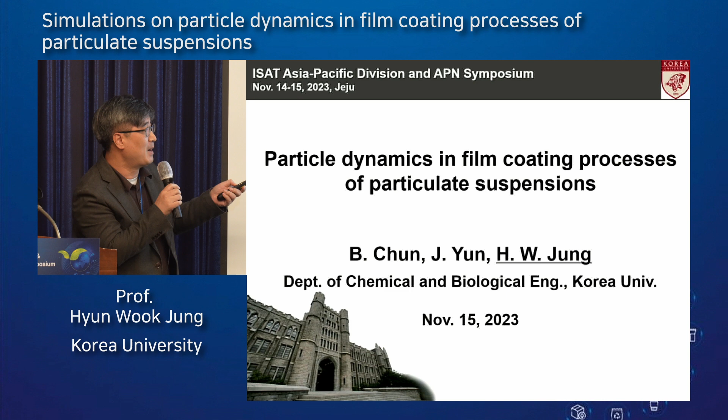Before starting my main talk, I want to introduce my research background. I'm worried that my research topic is maybe somewhat different from the topic of this conference.

As a rheologist, my research field includes fluid dynamics and stability in rheological processes, including polymer processing, coating processes, and microfluidic systems. We usually combine shear and extensional rheological properties of complex fluids, particle suspensions, experimental observation of flow behavior in rheological processes, and theoretical simulation and modeling for nonlinear stability or sensitivity dynamics.

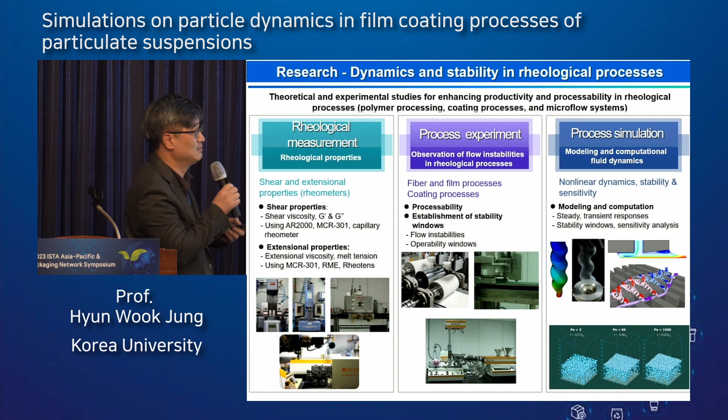In microfluidic systems, I'm also interested in many kinds of film processing.

The first case is film casting and the film blowing process. The second speaker introduced the film blowing process. We have a very small scale film blowing extruder, as shown here, to produce extruded polymeric film. We mainly investigate flow instability occurring in these processes.

For example, I'm sorry—could you click the upper right here? Oh no. The middle one and here.

You can see some periodic oscillation of state variables in the film casting process. Please click the next figure—one more—showing helical motion in film blowing processes.

Also, the second area is UV curing and thermal curing or dual curing processes to produce highly cross-linked organic film. The most representative process is automotive clear coat layer. We try to establish a relationship between the chemorheology of organic coating, the real-time cross-linking behavior or curing behavior during the curing process, and the physical properties of the finally cured films.

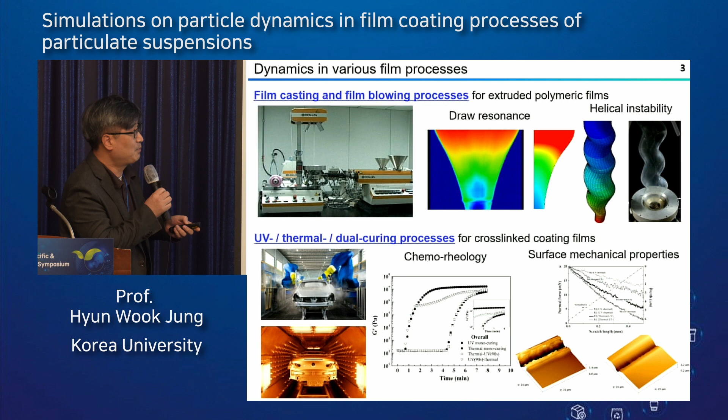The third part is liquid film coating for making particulate suspension film onto a moving substrate.

This is the main process of this talk. Film coating is a replacement of gas at the moving substrate surface by the coating liquid. As shown in this simplified coating line, for example slot coating, the coating liquid fed from the feed will be distributed and metered inside the coater, then deposited on the moving web, then dried and cured in the next step to make particulate suspension coating films.

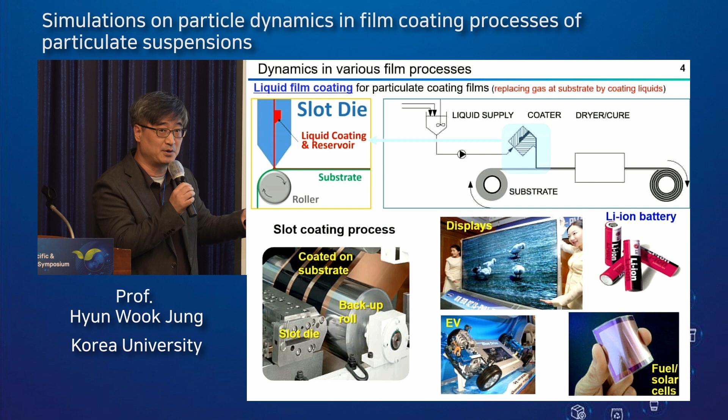In many cases, particulate suspensions or slurries are used to make many functional films like flat panel displays, lithium-ion secondary batteries, fuel cells, and so on.

In this talk, I will explain some results on particle motion in coating flow and particle distribution during drying in two cases.

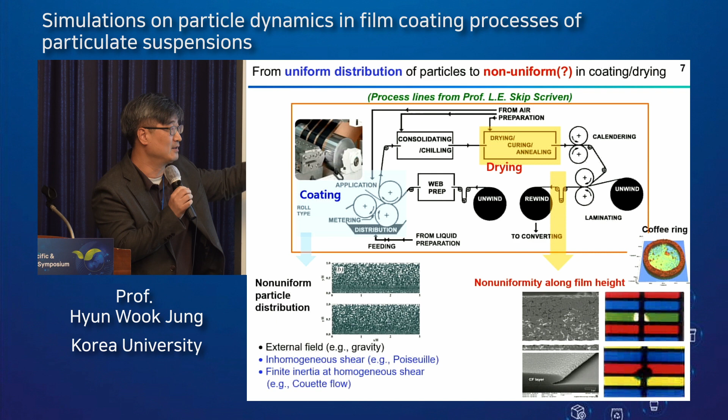Also in the drying step, we usually observe non-uniform particle distribution along the film height during drying. We try to numerically understand the particle dynamics in various coating flow fields and drying processes.

The first part is particle motion in suspension coating flows. This study was originally motivated by the slot coating process as shown here. In general, particulate suspensions are applied to make functional films such as lithium-ion secondary battery electrodes or fuel cell electrodes.

In this coating slot die geometry, the coating liquid will experience pressure-driven flow (Poiseuille flow), and then combined drag-driven flow and pressure-driven flow in the very narrow coating gap region. Particle distribution will be changed due to shear-induced migration in the inhomogeneous shear flow.

Also, if we consider polydispersed particulate suspensions, we can see some segregation behavior between the large particles and the small particles.

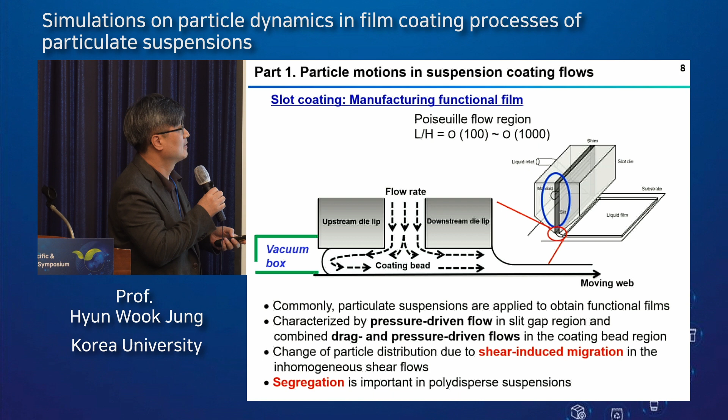To numerically solve particle motion in the flow field, we applied a continuum-based diffusive flux model—a phenomenological model developed by Professor Phillips—and a mesoscale particle-based lattice-Boltzmann method. A more detailed descriptive method will be explained next.

So first, we confirmed that our 1D and 2D continuum-based model and the lattice-Boltzmann method well predicted the experimentally observed particle concentration distribution reported by the Leal group in Poiseuille flow.

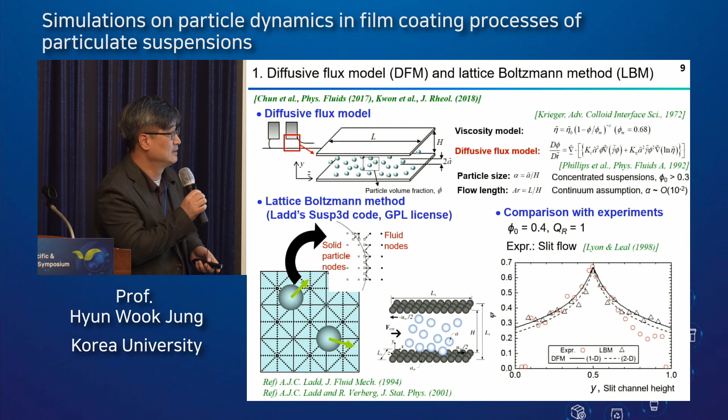These are our results. Let me briefly explain some results on the migration and segregation behavior in bidispersed spherical particle suspensions.

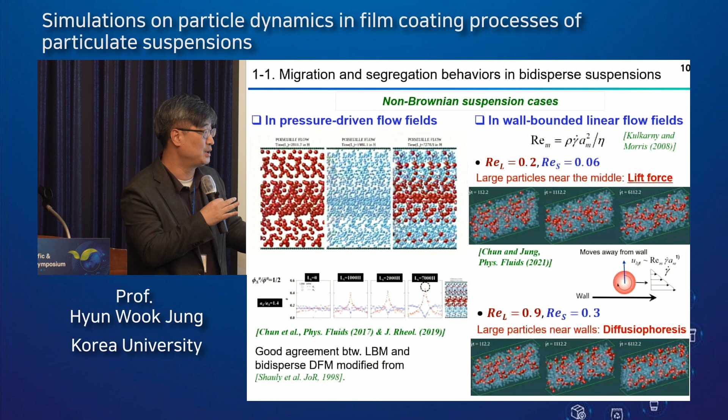So we further extended to non-spherical particle systems and various flow fields, because many coating applications consider many kinds of particles, covering the non-Brownian case and Brownian case. Also, these particles will experience very complicated flow fields, like shear dominant flow, extensional dominant flow, and mixed flow, and so on. So up to now, we only focus on the motion of rigid colloidal rod particles and their orientation ordering depending on the flow field.

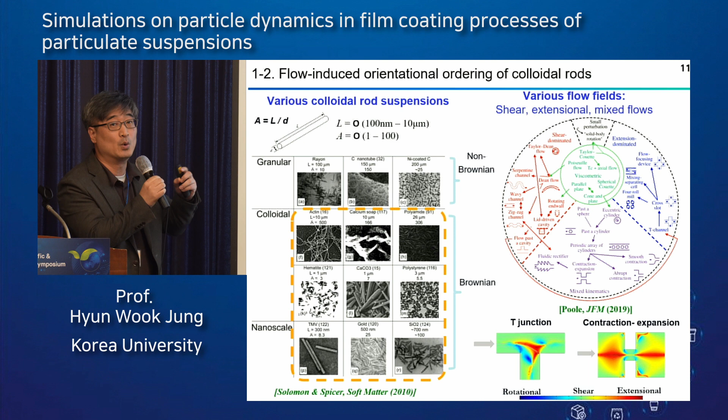We successfully designed rigid rod, colloidal rod, as a non-overlapping chain of spheres, as shown here. In that case, we first checked the basic features of the rigid rod in two cases.

The non-Brownian rod in simple shear flow at high Peclet number regime will show a Jeffery orbit, which is the very classical movement of a rigid rod in simple shear flow. Exactly correct, good agreement.

In the second case, the Brownian rod at Peclet number zero in quiescent liquid cases, we compared the mean square displacement of a single rod's position and orientation data, as shown here, giving good agreement between the LBM simulation and the slender body theory model, which is the classic model for the Brownian rod in quiescent liquid.

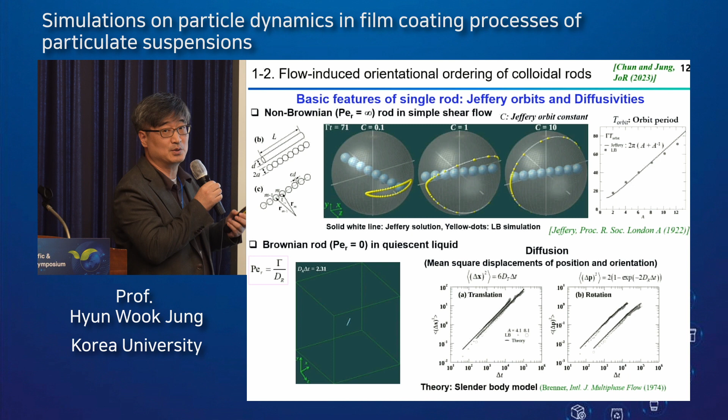Also, we found good agreement between the translational and rotational diffusivity from the two methods. After checking the single rod dynamics, we...

extended to the semi-dilute or dilute suspension system to investigate flow-induced orientational ordering of colloidal rods in various flow fields.

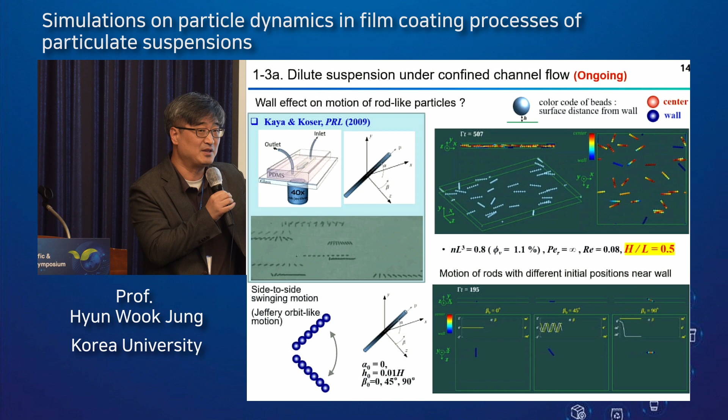We found that the colloidal rods are periodically swinging near the wall, if the particle is initially somewhat tilted up and down near the wall, as shown here. We also increased the particle concentration to the semi-dilute regime, as shown here.

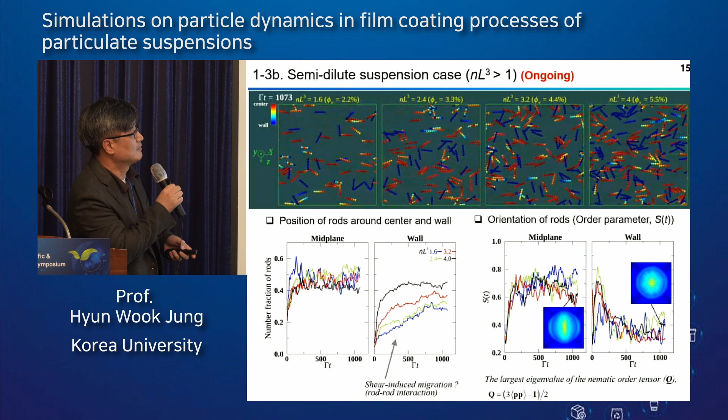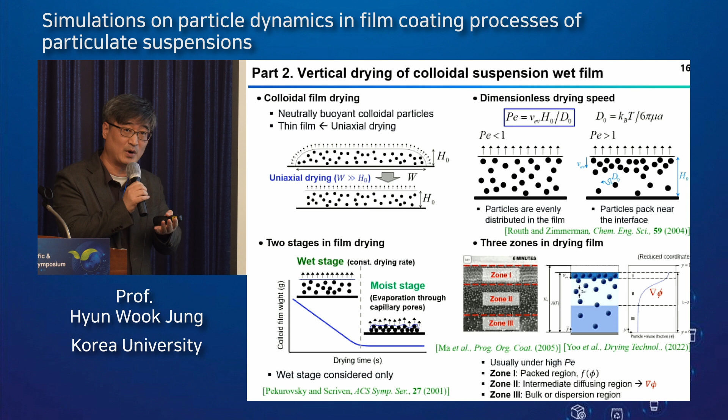In general, there are three regions in the drying film at the intermediate to high Peclet number regime: at the top, a packed region, then a diffusion region in the intermediate region, and a bulk or dispersion region at the bottom. We try to numerically understand this drying picture by changing the Peclet number, slow evaporation versus fast evaporation, for the monodisperse and bidisperse suspension cases.

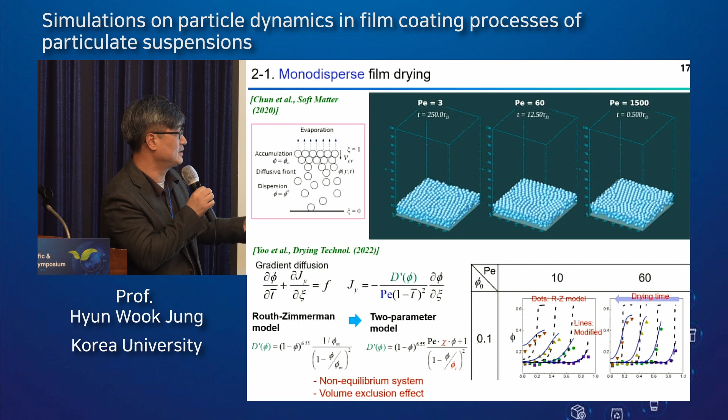We also developed a continuum-based drying model to interpret that behavior. A well-known drying model is the Routh-Zimmerman model. We modified this model by changing the diffusivity, the collective diffusivity term, with two parameters, giving good agreement between the LBM simulation and the modified model for predicting the transient drying dynamics under different concentrations and Peclet numbers.

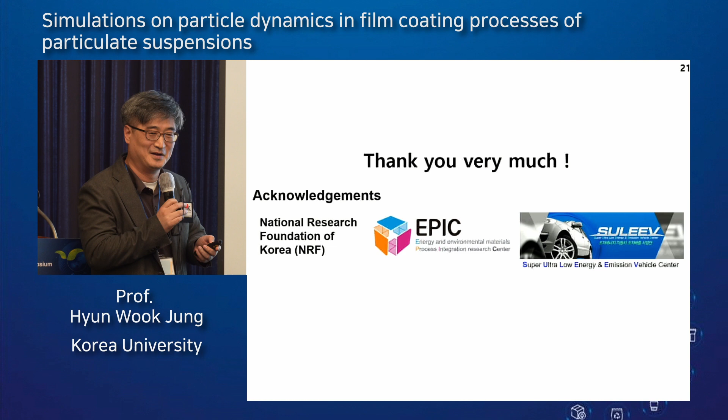Actually, I could not conduct experiments because I'm focusing on the processing or fluid dynamics, not the final property. So it is very difficult to observe the real-time particle behavior during the flow. I would like to compare with experimental data next time. We tried to find the literature, but we could not actually conduct the experiment ourselves.

And for the second case, I'm not sure. I have no idea about the packaging film, but if we apply particles as an additive or something like that, this result can help to control the particle distribution. I'm not sure about the discussion in making the packaging film.

When you make packaging film, the particles, what do you usually use? In my case, that is nanoparticle, some micron, micro size scale. So I only considered that.

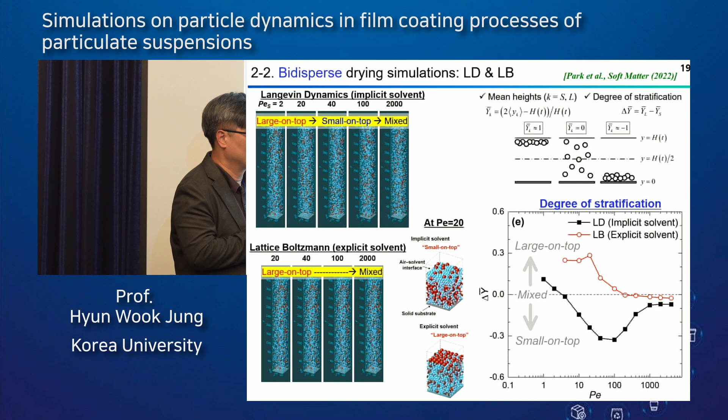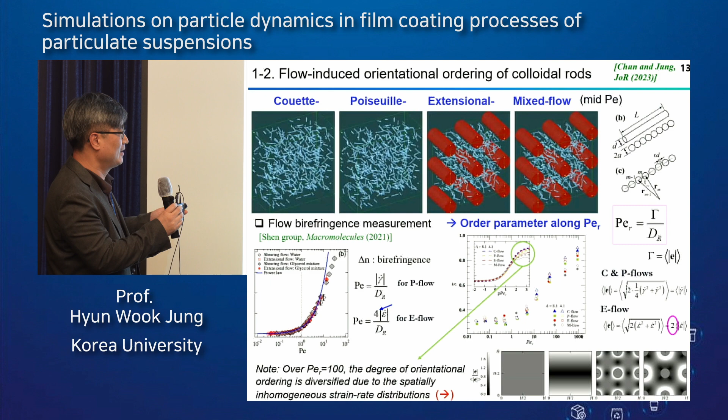A general question: when you see this kind of computational work, this work is computational work, but I'm not an expert in fluid dynamics and computational simulation. Many times I just think, how do we correlate this type of computational work to real industrial work? Like you said, this study just gives some result and estimates how the coating process will go. Very important question.

Actually, today's topic is somewhat academic, not an industrial application. But I applied computation to coating processes to optimally design the slot die and operating conditions. In that case, I tried to compare industrial experimental data with our simulation data.

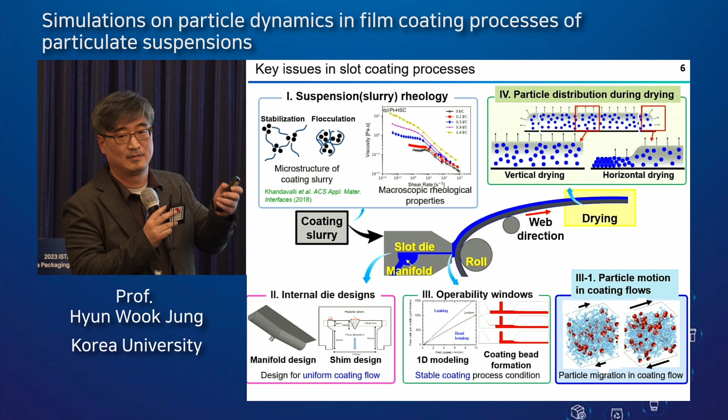Our research team is also working on lithium-ion batteries. Oh, this is very interesting. For fabrication of the cathode, we prepare the active materials and CNT, and sometimes including binders, which is a more complex system.

So how can we apply your ideas to that? If we want to change some solvent, can you calculate that? My particle dynamics system is a very simple case, just a mixture of hard spheres and solvent. Many slurries include small particles, polymer, and irregular particles, and so on. So I think I can give some fundamental physics about the very simplified particle dynamics, and then we try to correlate that result to very complicated slurry systems in the next step.

Very difficult case. Thank you, Professor Jung. Thank you.